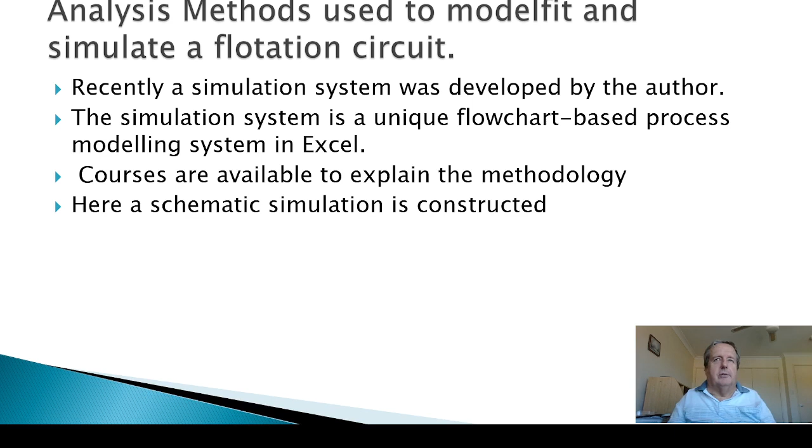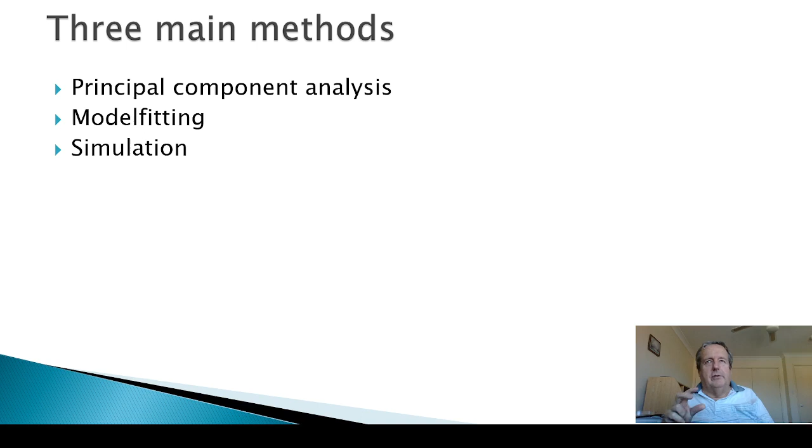The simulation I've constructed is fairly schematic. It's not yet at a point I would implement it in a process plant because there's not enough information. But it is still useful for explaining the concepts. So there's 3 main methods as part of this overall analysis approach. There's principal component analysis, there's model fitting, and there's simulation. All these 3 components I've developed myself. And so each of those are their own separate YouTube videos.

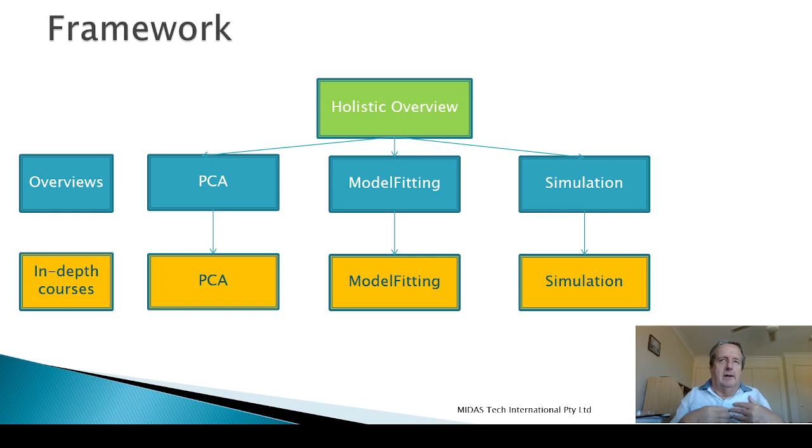So this video itself is a holistic overview, and then it's subdivided. The next 3 ones are overviews themselves of principal component analysis, model fitting, and simulation. And then if you want to do the in-depth courses, they're available in the yellow.

So what is principal component analysis? For a start, I doubt that there's any mineral processing engineering course in the world that would include principal component analysis. This isn't because it's not relevant to mineral processing. It's more to do with the fact that mineral processors aren't aware that it's relevant to mineral processing. Now, the simulation will be in flotation.

There's 2 schools of thought about flotation, and I'm a bit embarrassed to talk about the first, which is that flotation causes minerals to float. The second is that flotation causes particles to float. Now, clearly, every mineral processor knows that it's particles that float. Yet, when it comes to the modelling, they model the minerals floating. They use what's called a floatability component approach. So this first approach is convenient, whereas method 2 is realistic.

Principal component analysis is used to take data and determine common particle types. Now, my background, I did a lot of work in mineralogical analysis, and I'm not saying don't use mineralogical analysis. The trouble is that there's no, I know that's a generalization, but there's no systems out there which are user friendly. And so we're forced to rely on assay data and plant data rather than mineralogical data.

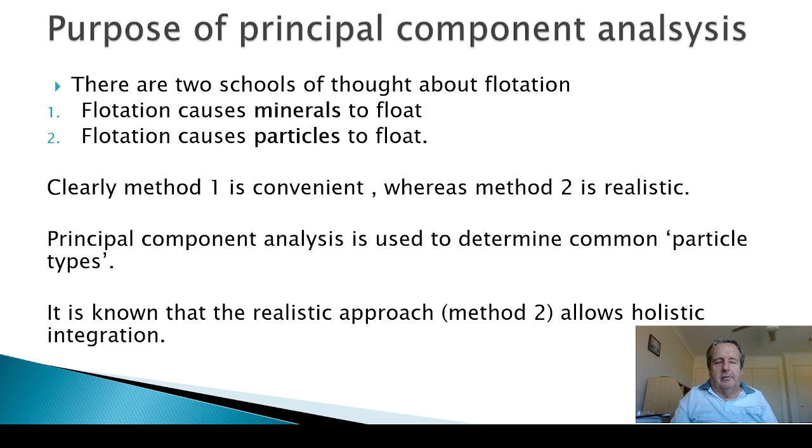Now, it is well known that the realistic approach is method 2. The problem is people don't know how to do it, particularly when you want to try and link in comminution with flotation. So here's a multi-mineral particle, which is the logo I use for my company. So there will be a variety of minerals and complex ores. Purple here might be hydrophobic, but the red might be hydrophobic as well. So it doesn't make sense to say that the flotation is dictated only by the amount of the purple. But we're not going to get into multi-mineral particles too much here.

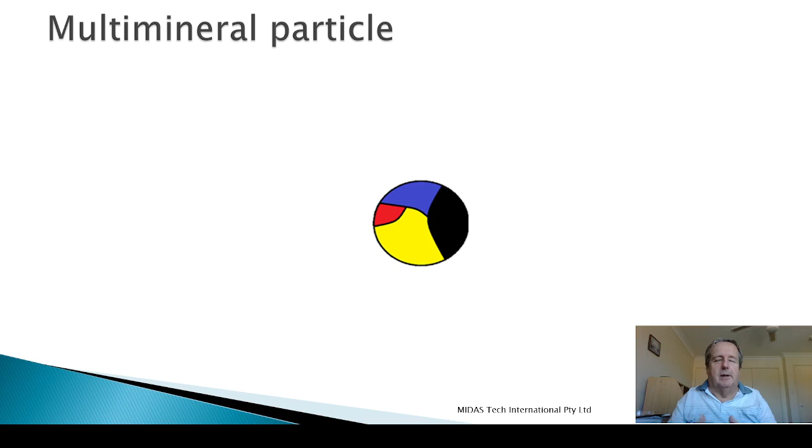So principal component analysis allows us to determine common particle types, and those particle types are simulated. But what we also want to know is, for these particle types, what is the kinetic rate? How well do they float? Now, I tried doing this with Excel, and Excel Solver gets limited. It was awful to use. So I had to create my own solver algorithm, which is available in the in-depth course.

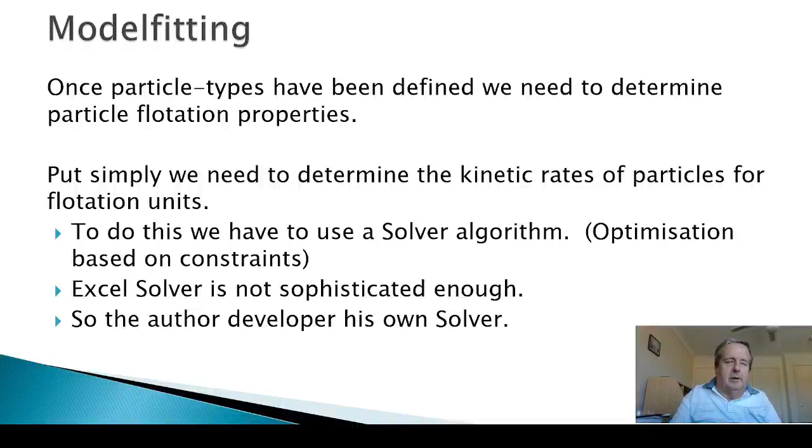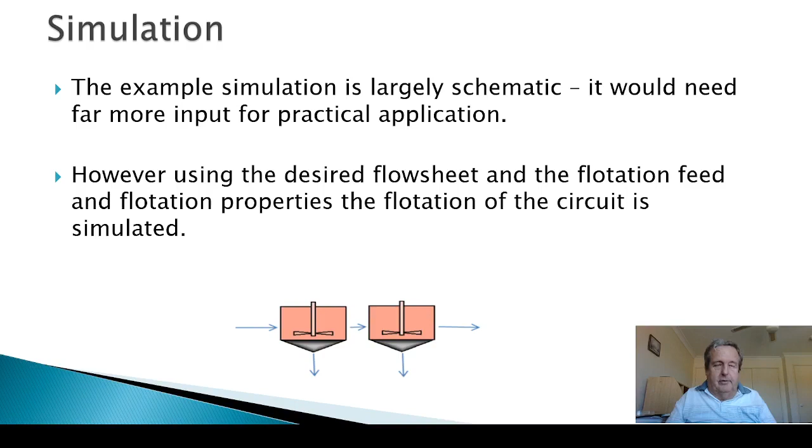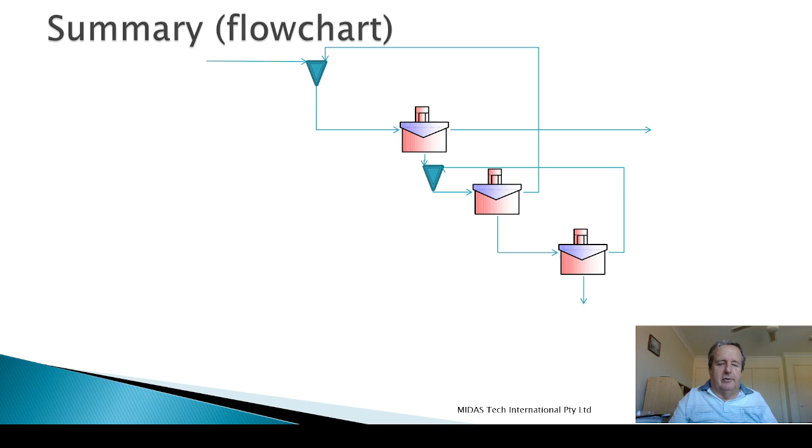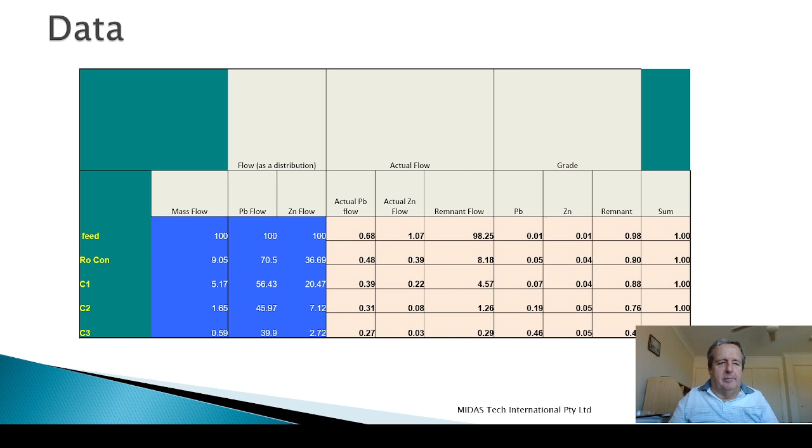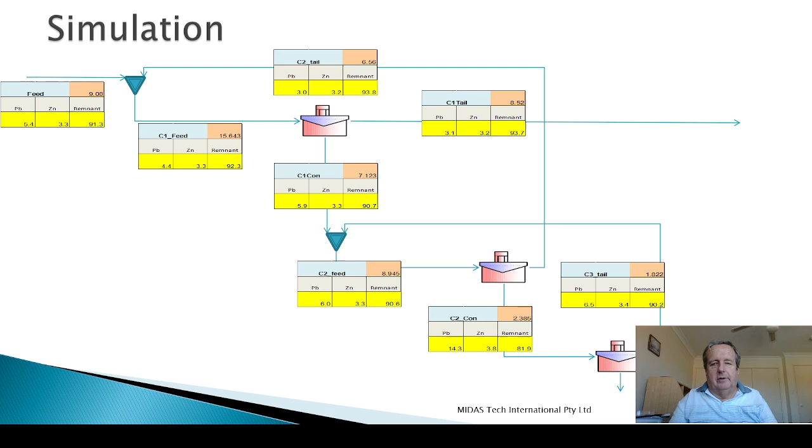I'm not using the rougher con data because after the rougher con there's comminution, and the client decided to keep this particular video focused on flotation. Later videos will talk about linking in with comminution. We won't go through the data here in depth, but it's fairly typical flotation data. We do that, we get the kinetic rates, we create the flowsheet, and we simulate. And we're not going to go over this in detail, but we can simulate this and get our final con given the feed.

So that's the end of the overview. Thanks for listening. And if you're interested, we'll be looking at those 3 facets in more depth: principal component analysis, model fitting, and simulation.